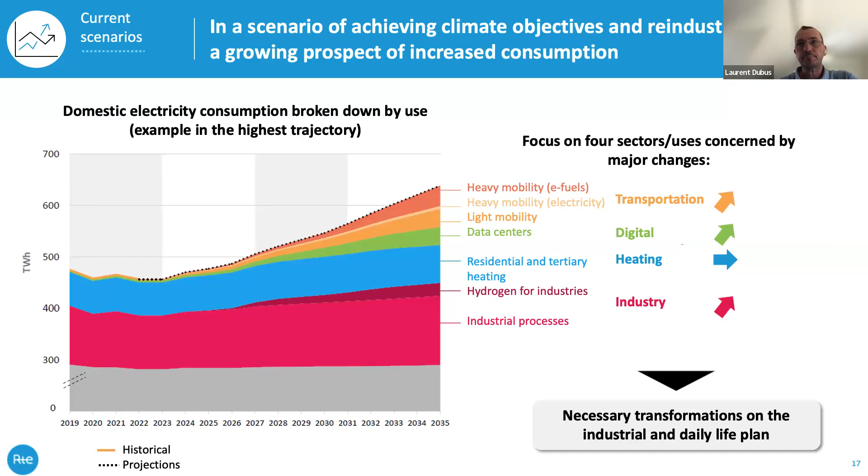So this is for the general scope, and I would like now just to show you what we do at the R&D level. I told about pride, humility, and lucidity. So first of all, the thing we are proud of is the power consumption predictions, which basically is the historical expertise of R&D at RTE. So we have methodologies. I think it's not revolutionary. I think everyone does the same thing, but it's something that works quite well, and we are pretty happy with the results we get.

So basically, we have different sources of data, and the idea is to use panels of consumers and load metering to reconstruct profiles of consumption for different uses. So I can mention, for instance, that we have a residential panel called Elecdom, the first top one. In that case, we have now 2 or 3 years of data in which we equipped 100 households with individual power plugs. So we have, I think, something like 25 individual sensors in every household, with a time step of, it's not even 10 minutes, I think it's 1 minute, so that we can monitor extremely accurately the uses per device for cooking, for charging phones, for internet boxes, and so on.

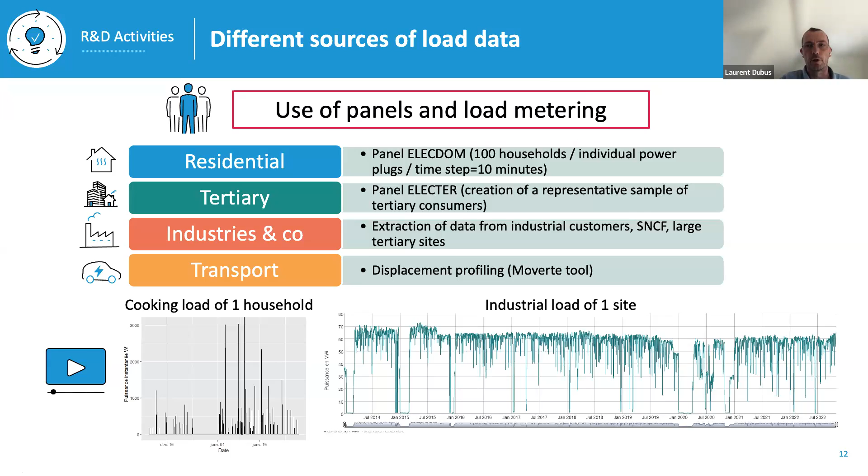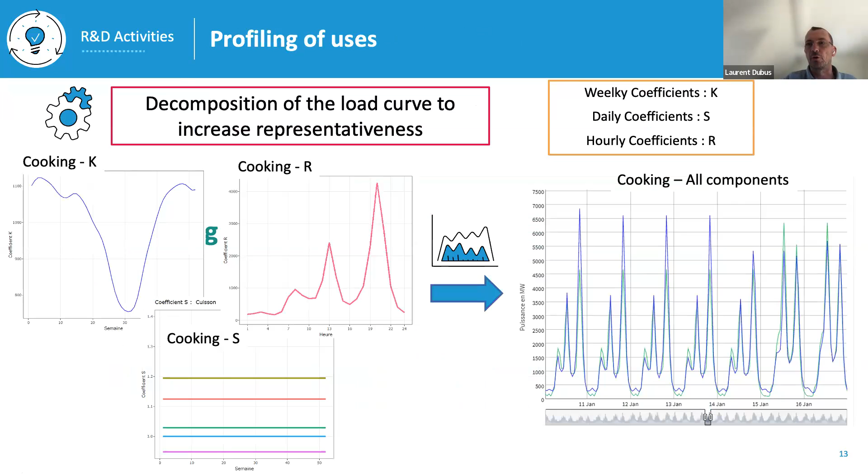So from this, we can then decompose the load curve to increase representativeness. And what we do in general is that we separate the different components from a time perspective. So we have weekly, daily, and hourly coefficients from which we can then reconstruct the load for all the profiles, and it works really well, as it can be seen here. So for instance, it's the new profiles at normal temperature. No, it's the overall profile for France. So you can see that the overall consumption is around 80 gigawatts in winter.

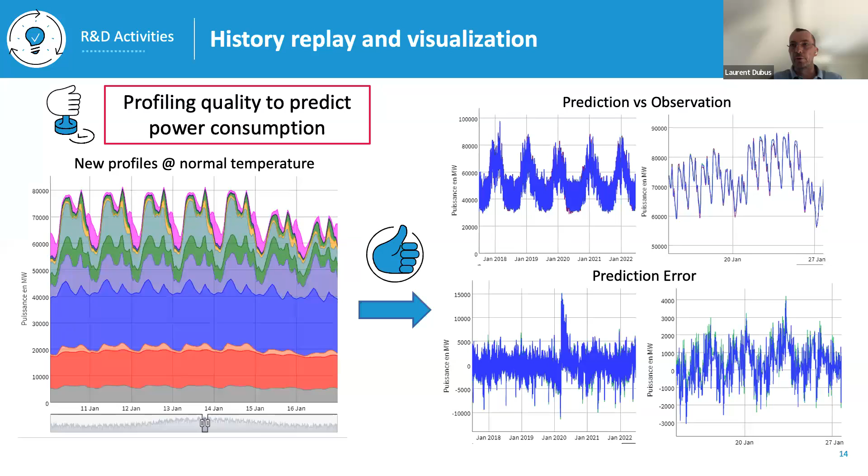And so if we compare predictions versus observations, if you look just at the right bottom plot, you can see that the average prediction error is close to zero, with more or less plus or minus 2 or 3 gigawatts of error based on a maximum value of 80 gigawatts. So it's pretty good. And overall, the mean error is around 1 or 1.5%, which is very acceptable.

If we just talk about the last one, there was a guy who was very famous at that time who predicted that the internet had no future because it was not able to handle bank transfers, for instance. I don't know if some of you know the Minitel, which was a revolutionary French invention in the 1980s, which in practice disappeared and left the place to the internet. So prediction is a difficult art, and we need to keep some humility when we do forecasts.

So how to predict the future? You can have different tools, or you can trust your good chance. But basically, when it comes to load, I guess all of you in the room do more or less the same thing, but you have different approaches depending on the time frame, on the time horizon.

So from the short term, where you can extrapolate things under unchanged consumption structure and modeling weather variability and hazard and so on. And the more you look into the future, the more the forecasts become predictions or projections, prospective rather than really forecast. The uncertainty increases, and of course you cannot be as accurate in the future as you can be in the next days or in the next months.

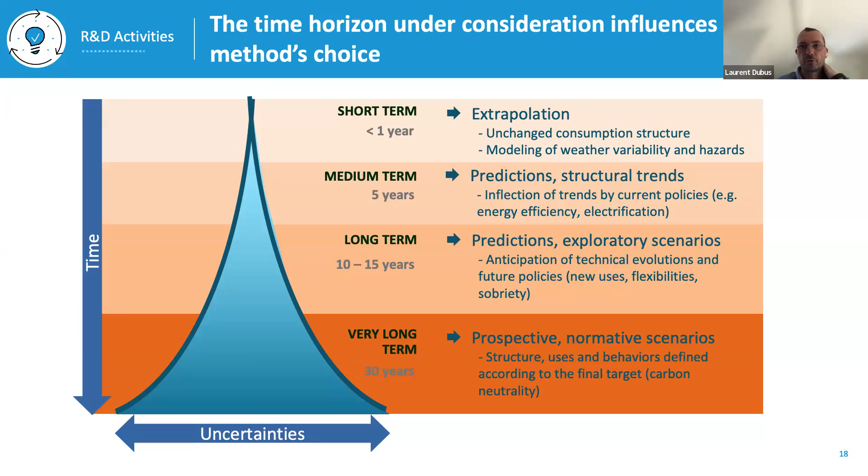What we try to do is to make an analytical representation of demand. So the consumption of a use or a branch is a mix between the volume indicator, which, for residential consumption, would be the number of equipped households. Then you just multiply by the intensity indicator. It would be unit consumption for the residential use.

And you need also, of course, to integrate socioeconomic, technological, behavioral, regulatory changes, and so on. You need also to take into account sector and total demands, which are calculated by aggregation. So basically, it's a bottom-up approach. And this kind of modeling is particularly suited to medium and long-term analysis. So that's basically the approach we take for long-term forecasting.

And of course, you also need to take into account projections or scenarios in terms of energy efficiency related to the thermal renovation of households or industries, the technical progress with, for instance, the increase in the efficiency ratio of heat pumps and things like that. You need also to consider assumptions about what we call the volume effect, which is related to the evolution of demography, the evolution of the economy through GDP, for instance, the level and the rate of electrification of the uses,

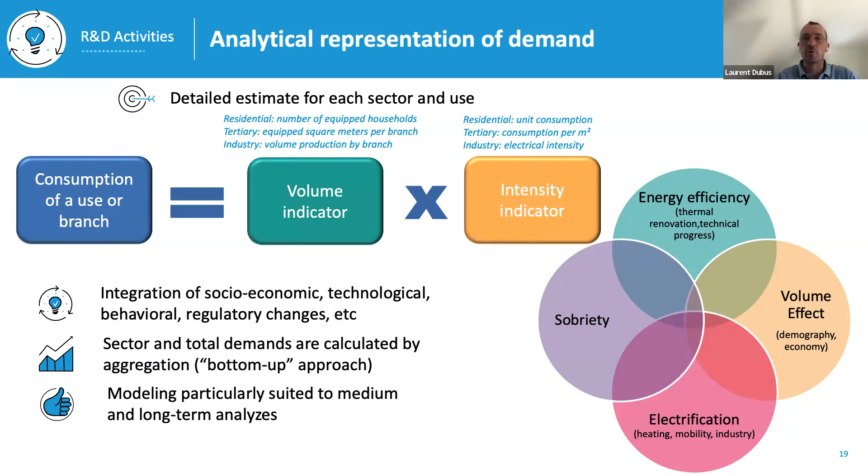and also some sobriety measures by which consumers would become more sober in terms of energy consumption, like we had this winter, because you may know that in Europe and in France in particular, we had a difficult situation this winter, and we strongly encouraged consumers to reduce their consumption, and it worked quite well because we estimate that there was a 10% reduction in consumption linked to sobriety.

Now, if we want to be lucid, we have a very, very important need in our case, which is to localize the future load, especially when it comes to the perspective about the development of the network itself. Because the network, you all know how it works, and if all the consumption is localized in a single region or a few regions, then from a network operating system point of view, it can be very difficult.

So one of the strong issues we have, and what we are working on very hard at the moment, is to really localize the future industrial load. Sorry. So we have really a prospect for an increasing electricity consumption. So we have many requests for connection to the system by customers. Not all of them are absolutely relevant, so we need to also understand how it works and so on.

You can consider, for instance, that some consumers make requests for network connection in different sites, depending on their different options based on the price of the land and so on. And so we need to carefully analyze all that to make our best estimate of where the consumption should be developed. And so we have a new strategy for four major industrial port zones, in which we want to encourage customers to install their new facilities, because it would be easier from a network development perspective.

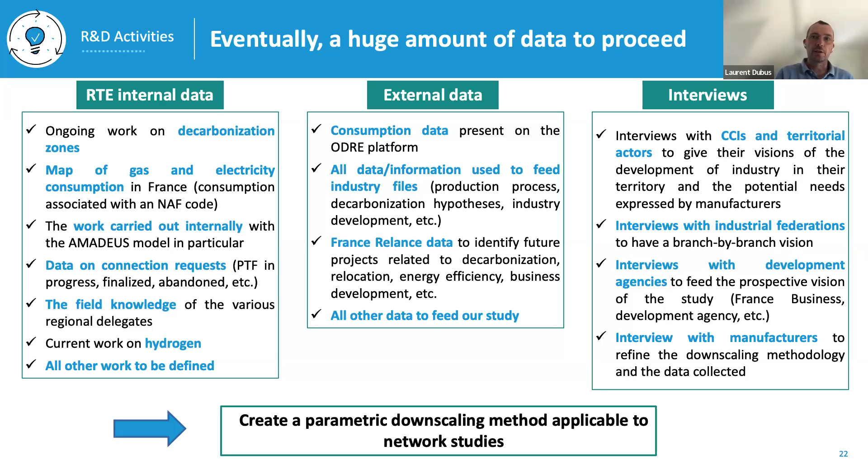And what we aim to do at the end is to create a parametric downscaling method, which would be applicable to our network studies. Coming to my summary, because I think my time is over, I would just like to emphasize that long-term perspective starts with those forecasts, or rather load scenarios, because we can't really speak of forecasts several years or even 10 or 15 years ahead. The second point is that electrification of fossil uses will really be a game changer. It's necessary to fight against climate change, but it will really be a game changer.

And so the complexity of load forecasting is increasing compared to what we knew in the past. The fourth point is that data access, collection, and capitalization is really key. We need data to improve our load forecasting tools. And also, of course, we need to not forget that climate change needs to be taken into consideration.

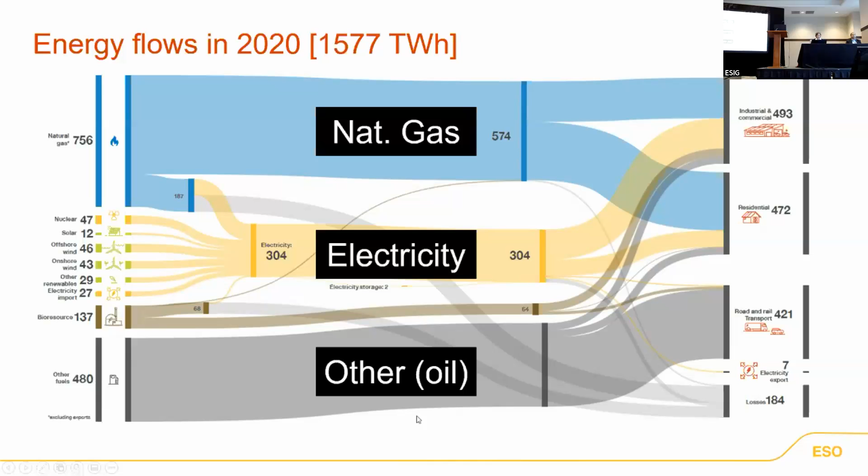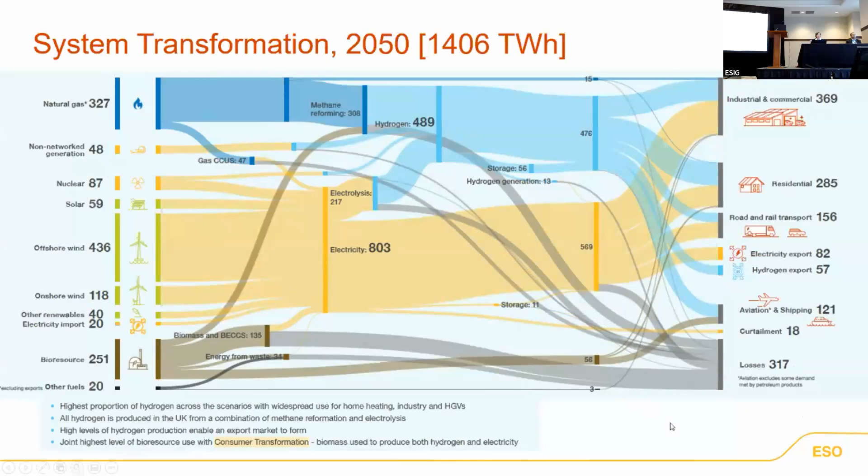We're able to look at different scenarios through a close understanding of sources of demand on the right-hand side, and then where it's going to come from, so we can start to understand how energy flows every year between now and 2050. The scenarios themselves are used in this country for network planning, deciding what assets and infrastructure we need on the ground, what market mechanisms we need, and what policy we need as well.

So we launch every year, and in that annual cycle, we're working very closely with the government and a lot of stakeholders through the industry. Right now, we're part of a private company. We are going to be owned by the government in about a year's time. Our name is not decided yet, but we're going to go into government ownership, and we're going to be an arm of the public sector, essentially, providing formal advice to the government over the next 12 months. That's something we're thinking about and getting ready for.

A lot of the data I'm sharing with you is from our last publication, which, because of how timings fall, is almost a year old. So if you're interested in learning more and seeing our most up-to-date numbers, we're launching on the 13th and 14th of July. It's a virtual event, and specifically, we're going to be talking about energy consumers on the 14th of July. But we're going to talk about all these subjects, and there's a link at the bottom for where to register. If you just search future energy scenarios, you'll find us.

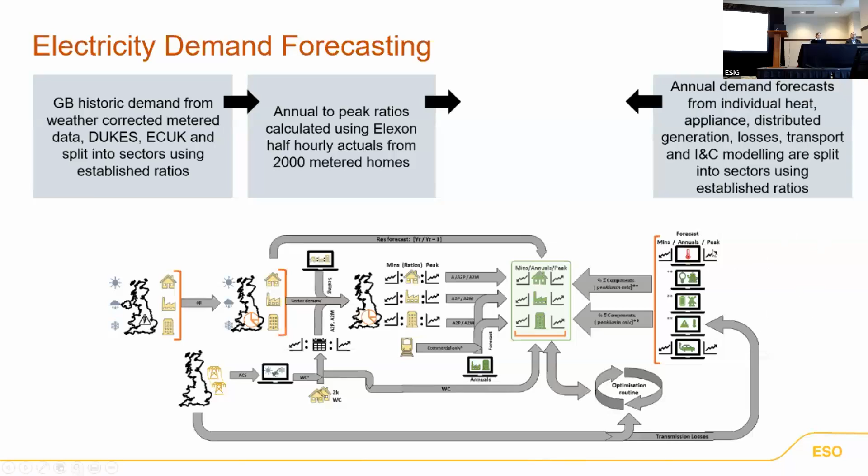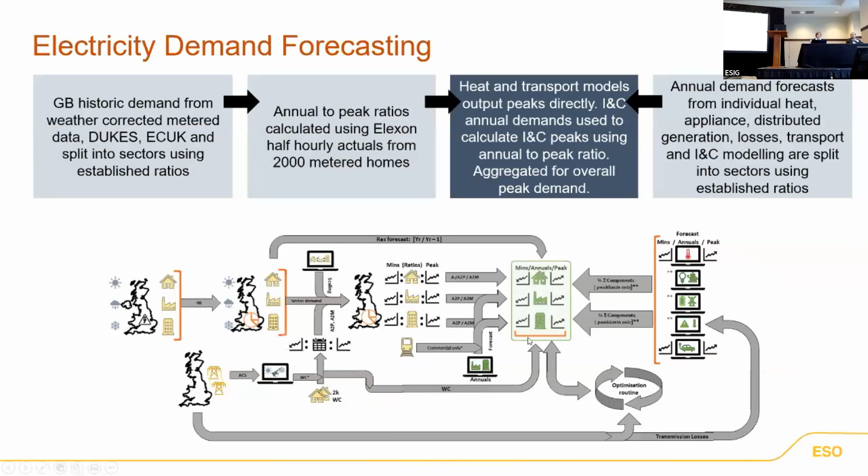To do all of the stuff that I've talked about here, we absolutely need diverse input. We place a lot of value on qualitative research as well as quantitative research, but we speak to a lot of people. We speak to something in the region of about 500 stakeholders for our first publication.

And for the stuff that I'm talking about here, there's been 26 separate engagement sessions with groups of people. We use diverse sets. We make sure that we're looking for people who disagree with each other and disagree with us as well, and we're looking for a range of views, and we test them regularly with each other. We have a rigorous process of peer review within the company, but we also test that with the government, and we test that with our stakeholders. We really want to invite that challenge, and we do that at the start of our modelling year, but also partway through.

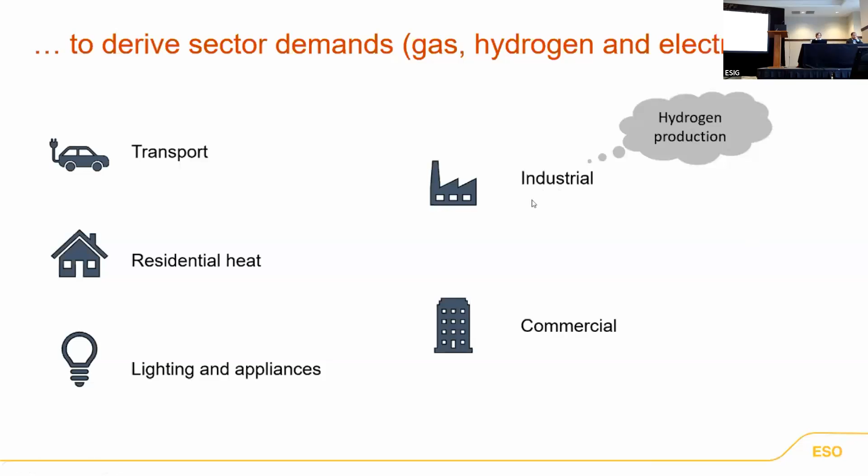And so once we've got those levers, we can put them into our models, and we get our sector demands across these sectors. Industry is very interesting. We've got a feedback loop between demand forecasting and supply forecasting because of hydrogen production. So there's an industrial electricity demand for electrolysis, green hydrogen production, and there's an industrial gas demand for blue hydrogen, for methane reformation.

Things have been particularly chaotic in Britain compared to the rest of the world. In about October, November, while everybody was struggling with an affordability crisis, we had a new budget that introduced a lot of uncertainty to price forecasts in Britain. So over the past 8-9 months, the whole world has been experiencing uncertainty and volatility. That's been compounded in Britain, but we've managed to forecast through it.

So here's our main insight really: that affordability crisis does suppress demand in the near term. I'm talking about last year's numbers here, but between now and 2026, we were predicting demand to be fairly flat. We're now forecasting between 10 and 20 terawatt hours of price elasticity, and we've seen that.

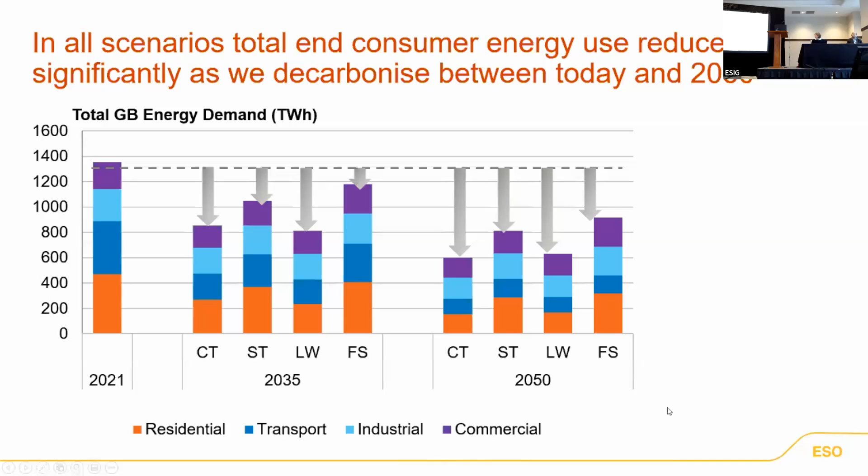So I'll get into my last few slides, which are about actual insights to give you a flavour of the kind of things we can work out. We know that end consumer demand reduces significantly as we decarbonise. At the beginning of this presentation, I showed you some energy flow diagrams, and the makeup of that energy flow changes, but it also generally reduces between now and 2050. On here you can see the stack between different sectors - the sector split doesn't change too much, but we see transport demand going down significantly.

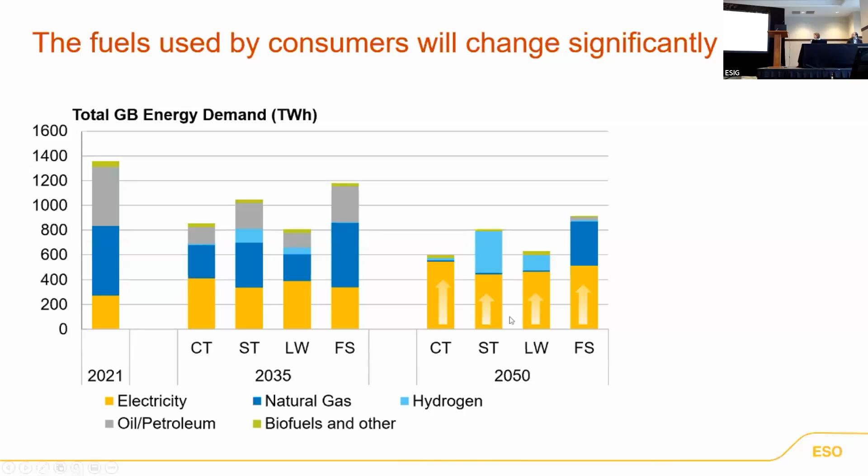The fuel people use will change significantly. A really interesting thing to point out on this slide is this bar here, sort of third in from the right. This is our high hydrogen scenario, system transformation. This is our scenario for reaching net zero by 2050 using what we think is the credible highest amount of hydrogen in the economy, including hydrogen for heating. Even in that scenario, we have a doubling of electricity demand. So we can't get away from increased electrification.

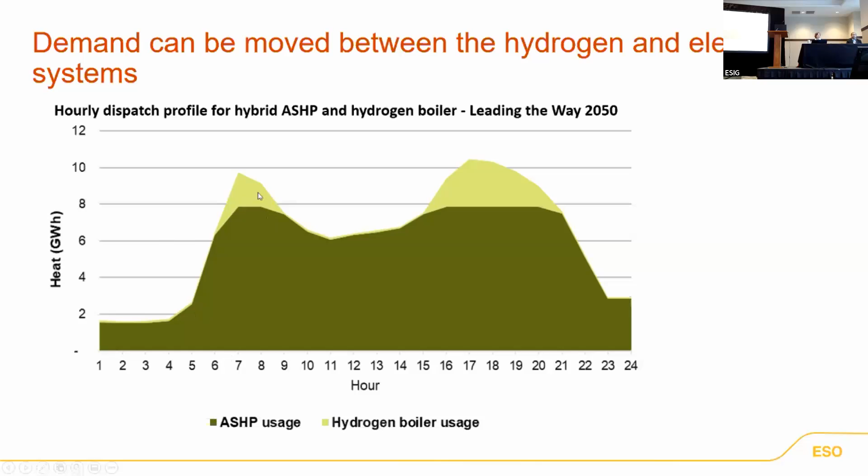And here you can see how flexibility works between different technologies. The dark area is the hourly dispatch profile for air source heat pumps, and the lighter shaded area is what peak demands would look like for hydrogen boilers. We've normalized this for heat demand rather than electricity and gas. And you can see we're able to flatten out heat pumps easier than if demand was hydrogen-based.

And this sort of flexibility isn't just a pipe dream. We are doing it already. Last winter, the ESO launched the demand flexibility service, letting consumers engage in flex and save money off their bills, in collaboration with a number of energy suppliers in the UK, and that cut our electricity use by 3.3 gigawatt hours. We've got about 1.6 million homes engaged in that trial. We're planning to make that bigger next year and then make it a part of our normal arsenal of flexibility and methods to meet demand.

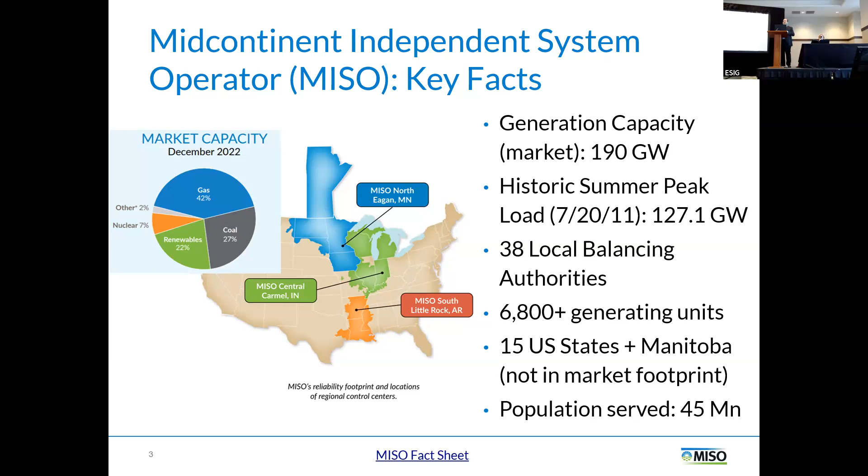The other point there is, if you look at the pie chart in the left corner, you can see the generation capacity now is very heavily weighted towards gas, and also coal. About a decade ago, this was predominantly coal. So that's one of the changes that we have seen over the past decade, and changes are of course continuing.

We have seen a lot of retirements of coal and other fossil fuel, but primarily coal, over the past decade. There's been a large increase in renewable capacity. As of the end of 2022, we had registered wind capacity of about 30 gigawatts. And also over the past few years, solar has come into the picture quite rapidly. Again, as of the end of 2022, about 4.5 gigs of solar photovoltaic.

Some of the other things that we are seeing are many cities, many states, and also member utilities have aggressive decarbonization goals or aggressive clean energy goals. And that's also driving the pace of the energy transition.

A few more things to think about are that as we see this increase in renewables, more of our fleet is going to become weather dependent. This also ties into the fact that we've also seen more frequent extreme weather events. And so now, the uncertainty in operations is also increasing, and so we are having a lot of challenges in managing that. And then the last point is about increased electrification, which I'll talk about a little bit later.

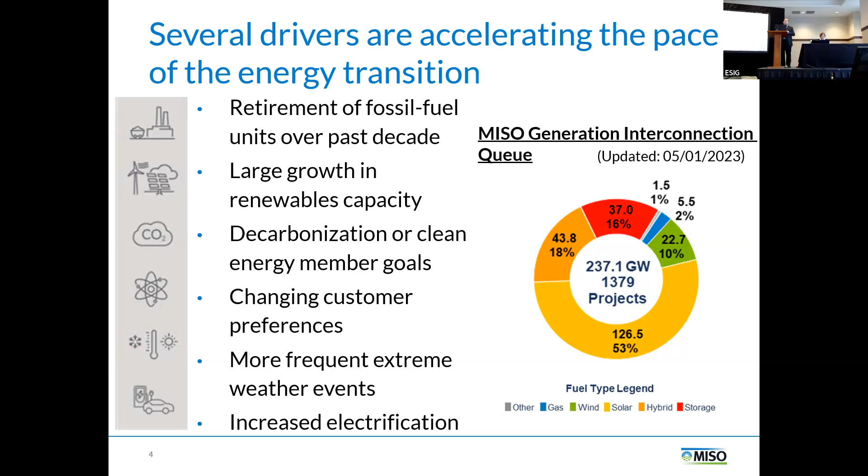On the right is a picture of our generation interconnection queue. As you can see, it kind of gives you a snapshot of what the future might look like. Of course, as AG from ERCOT had mentioned, typically not all of these things get built out. But let's say even if a fourth of this gets built out, you're talking about 126 gigs of solar PV in the queue. So even if a quarter of that is built, that's quite a substantial change in our generation capacity mix.

In order to deal with this energy transition, MISO is working simultaneously across multiple areas. It spans planning to operations. So the first is the market redefinition. This is really talking mostly about our energy markets, but also capacity markets more recently: whatever changes we need to make to our market constructs in order to accommodate this change.

Then there are also system enhancements. We have a major project ongoing to put in place our next generation market engine, which will be modular. It'll be much more performant given how many more resources we are expecting. We still want to be able to solve that market and clear the market in about the same time. So we really need a new system for that.

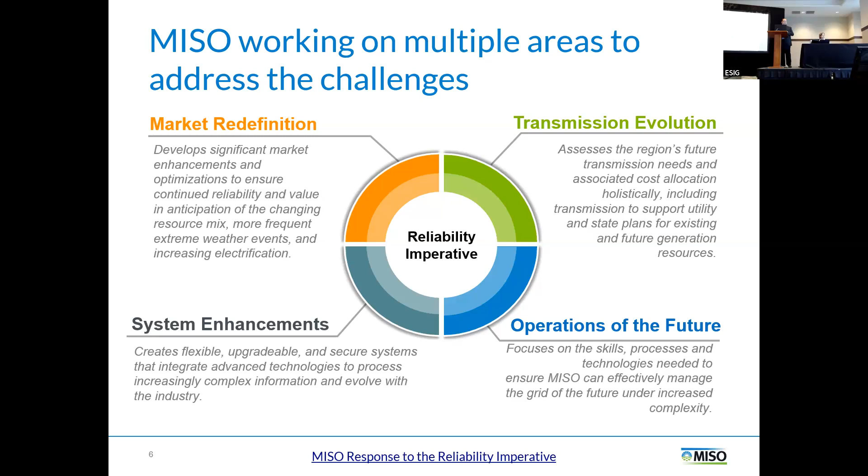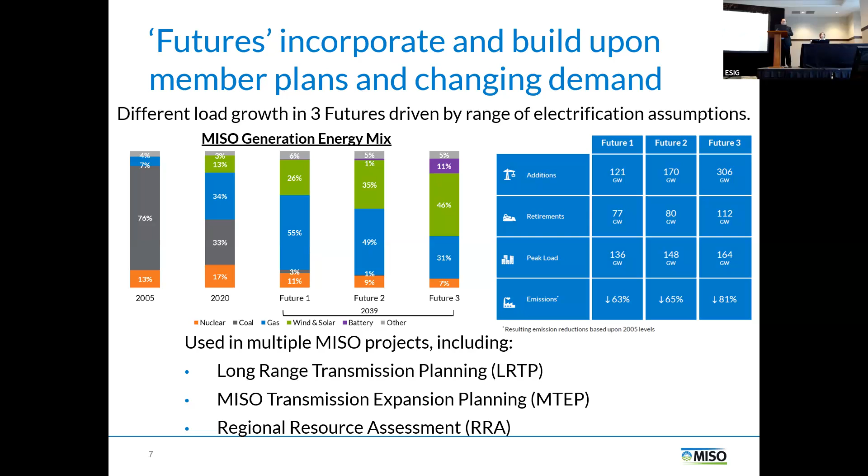And you can see, ranging from Future 1 to Future 3, they get more aggressive as you move from Future 1 to Future 3. These futures are then used to plug into various planning initiatives and also various analyses. I won't be able to go into all of these. We have our long range transmission planning, we have the transmission expansion MTEP work, and then the last piece there, which I'll expand upon a little bit, is the regional resource assessment.

In terms of how we looked at electrification, we sought out help from some experts in this field. One is the Applied Energy Group, and the second is Berkeley National Lab. Both of these organizations helped us to identify estimates of the market potential of electrification of various technologies, things like water heaters, electric vehicles, and various industrial processes.

A number of assumptions were considered depending on how mature we think these technologies will become, and we also got detailed numbers for our different zones. In MISO we have 10 zones, LRZs, and within those we got zone-by-zone numbers, so we can understand what's happening at that zonal level. You can see the projections going out over the next 20 years in these two figures.

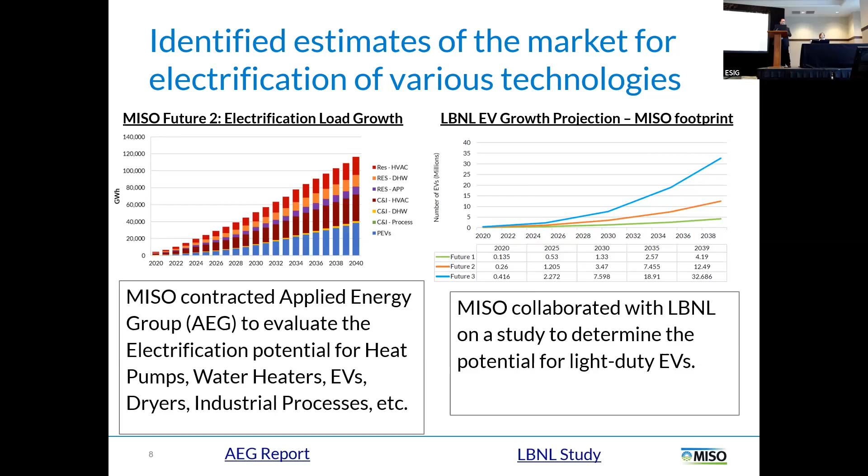One of the key insights here is that, depending on the future, the renewable penetration levels range from about 26% to 46%. But one of the studies we had done a few years back, the Renewable Integration Impact Assessment, the RIIA study, indicated that we're going to have some challenges as we cross the 30% penetration level for renewables.

Somewhere between 30% and 40%, we're going to see a lot of challenges in terms of curtailments, having to deal with regional transfers, and potentially, in some local areas, voltage stability issues due to the weak grid when you have a lot of inverter-based resources. That's one of the challenges you might face, so that's something to be concerned about.

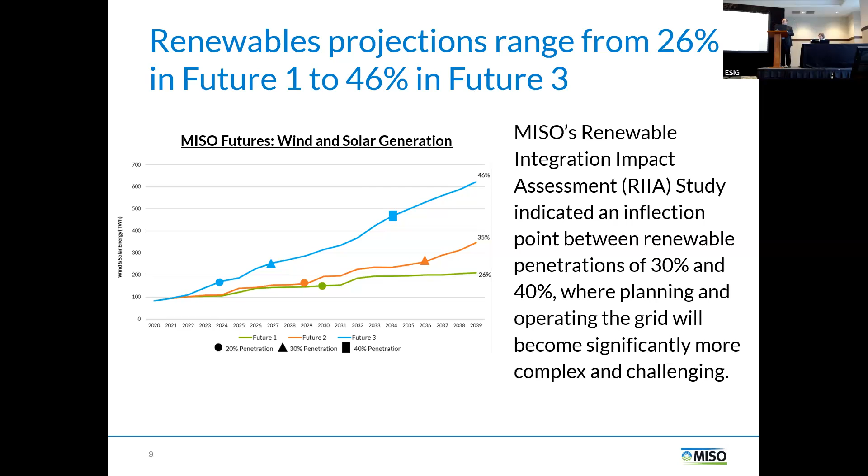Coming back to the MISO futures, that was two years ago, and now that's a little bit out of date. So MISO has been working to update all of those projections. Just a few months ago in April, we released a revised version of Future 2. We are currently working on revised versions of Future 1 and Future 3, which we hope will be released sometime later this year.

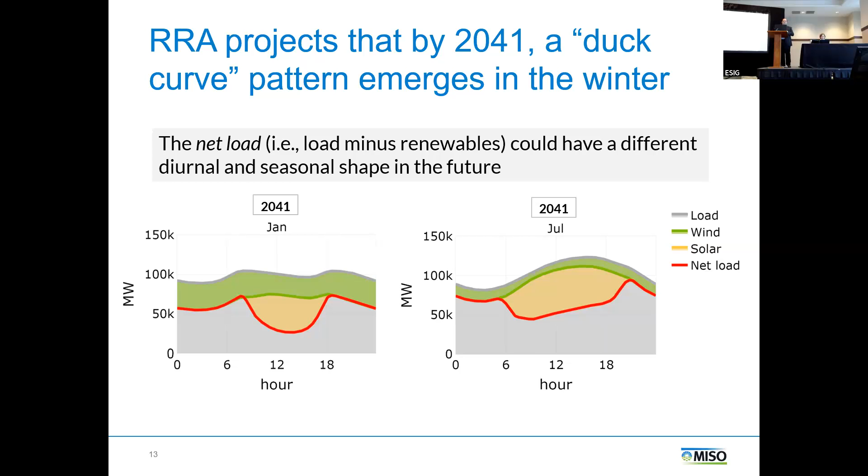Now, in terms of potential disruptors that could impact all of this, one is risk of retirements due to various policies. The RRA picture that I just showed you did not include the IRA impacts, because we had more or less done most of our number crunching by the time IRA's impacts really came into the picture. We were not able to pivot at the last minute and put that into our analysis, but we will start doing that going forward in our reports. So that's one thing. We could see accelerated retirements of fossil fuel units that could lead to some challenges.

We could see more aggressive decarbonization goals from states, cities, utilities. It could also be from corporates. We are hearing about Google and Amazon and various others wanting to move more towards decarbonization. Then there's, of course, the pace and scale of electrification. The studies that we did for EVs and many of the other technologies are a few years old now. EV growth may accelerate, given the policy support. And then there are things like data centers, crypto miners, distributed energy resources, microgrids.

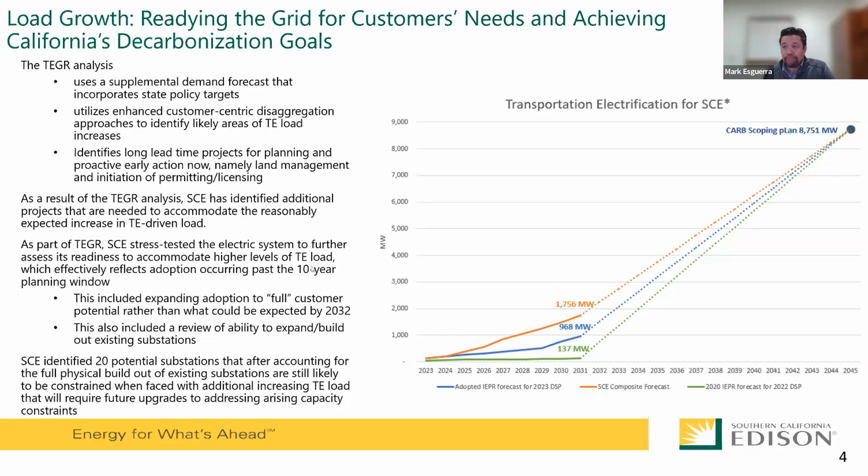And so a big part of the forecasting is understanding really where load will materialize. As part of our general rate case process and our normal planning process in the state, there's a traditional disaggregation process on how we allocate load from the system level forecast down to our distribution feeders. As part of that, we also work to understand which customers are likely to adopt. We were also building our relationships with some of the larger transportation electrification fleet operators in the area, and really trying to map that adoption by different customer types.

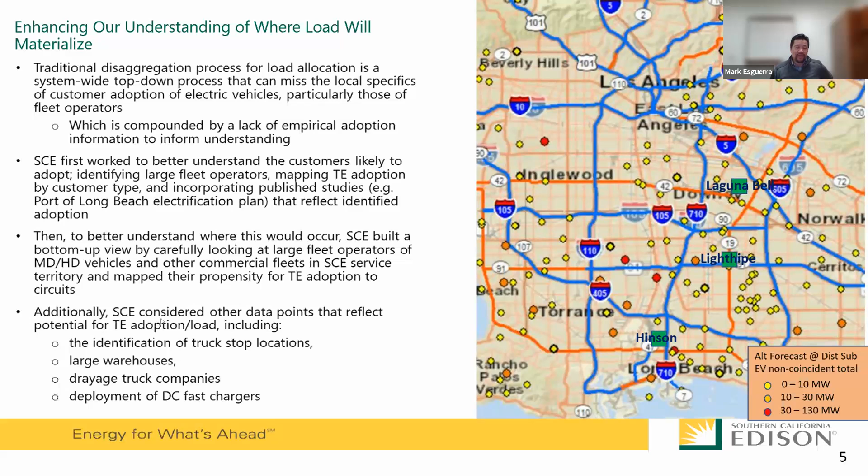Thank you. All right. Where I left off, I think we talked about different data points that we consider as part of our forecast. So I'll get into a little bit more about the EV forecast comparisons and some of the details of how we forecast. I'll jump to the next slide here. As we mentioned earlier, the state forecast we were going to be mandated to use was a little under forecast at the time. It's since caught up, but in the work that we've done, we break it out by vehicle type.

For light duty vehicles, we performed a regression analysis to identify the key indicators of EV adoption by using historical EV adoption and customers' demographic and socioeconomic data. In addition, we also reflected potential EV adoption from some of our low-income customers by utilizing our most recent internal customer segmentation analysis, which was captured by our own customer service database.

We then allocated the supplemental forecast using some of the different policy measures, particularly what the California Air Resources Board had in their mobile source strategy forecast, from our system level down to the circuit level based on relative propensity scores for all our various distribution circuits within our service territory. The next two are medium and heavy duty.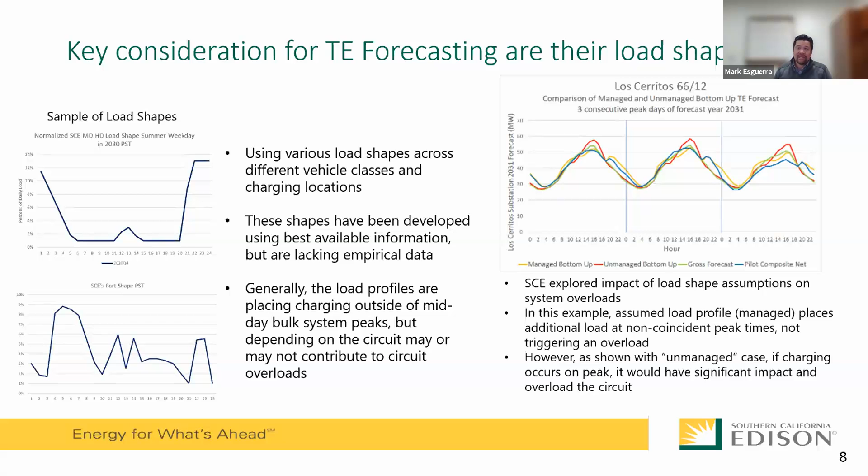We looked to see if we had cases more similar to our time-of-use rates, and we definitely saw impacts to our cost forecast in terms of infrastructure. There are a lot of curves there—the red curve is unmanaged, and it's higher than the other items. The yellow curves represent a more managed profile, along with other curves we have there, and you can see it's much lower than the red curve. Depending on where your system limitations are, this could create overloads.

So in short, we're running the grid and seeing that forecasting really matters. More work is needed, but based on our analysis, targeted investments are needed now. We've done our bottoms-up analysis, and Kevala has done some work we're going to learn from as well as others, to improve on that. There may be multiple scenarios we'll have to perform and figure out how to align. What we've seen is that based on our forecasting, about 10 to 15% of our distribution assets are being proposed where we're seeing high amounts of transportation electrification. We think that's going to change.

We think now that the forecasts are getting updated and more interest is growing, we're going to see more growth. But we do have growth in some key areas, like the Port of Long Beach, that based on their projections, we're seeing things that could be anywhere 10 to 20x of what they were looking at, which would be entirely transformational, and other challenges for us to build out the grid as well as how we get other supply resources.

We're seeing this today, and we're using information we're getting today to inform our forecasting. One thing we've noticed since 2021: we were tracking just the transportation electrification requests coming in at 500 kVA or higher, half a megawatt or higher. Since 2021, we've received about 700 of those, probably closer to 800 now factoring in this year. When you look at it year over year from a request perspective, the volumes have been going up. But even more importantly, the average size of these requests is also increasing year over year.

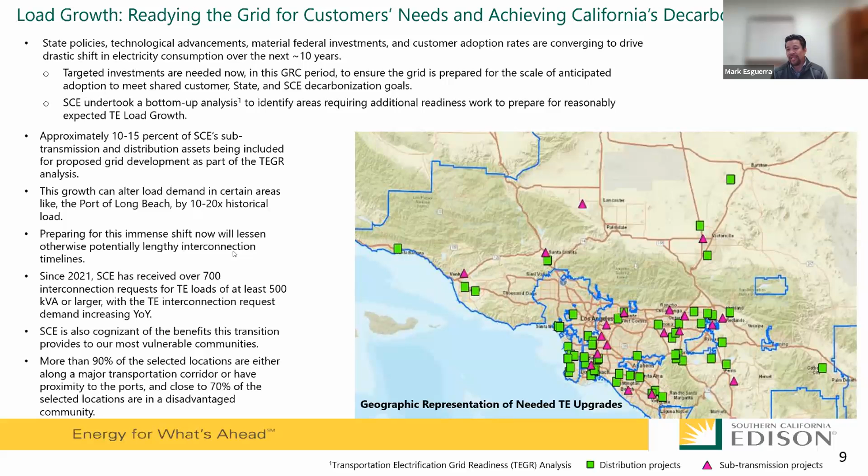In addition to the forecasting and the impacts, we are taking all the work we have and trying to take an integrated approach. We have a lot of infrastructure forecast to be replaced from an aging perspective, so we're really trying to marry that up with where we're seeing electrification. As we're building those work plans and layering in the forecast, we want to make sure we're coming with a comprehensive solution, not just replacing like for like, but factoring in some of the other needs. And we're going to continue to see how grid modernization capabilities such as load management tools, leveraging DERs, can help us there.

We're really looking for more partnerships along the state to help meet this, because we know we can't do it alone. It's going to take good forecasting, continued learning on the forecasting, applying those methods. It's going to require wires, technology, load management, customer behaviors, all the above. So with that, I'll stop there. Thank you for the opportunity.

Thanks everybody. In our first session this morning, we really heard from practitioners and planners working in industry directly on scenario analysis of what the future might look like in terms of load and what that means for the grid. I really liked how Mark brought up the distribution side, echoing some of the things we heard yesterday afternoon. The overall theme for today, bringing things together, bringing it all together. Now we're going to turn back to the methods side of things: how do we do load forecasting? Ryan's also going to expand our thinking a little. We've been talking about how a lot of different things are coming together, all these demand sectors and the grid, and Ryan's going to expand that into different fuels as well. When we think about total economy decarbonization, we've talked about hydrogen, but that also elaborates into what other kinds of lower or zero carbon fuels we might be using, and how those all interact with each other. Then we'll be hearing from Andy from Itron again about bringing all the sectors together and all the complexity we have to deal with, and how we get it all straight. So with that, I'll turn it over to Ryan.

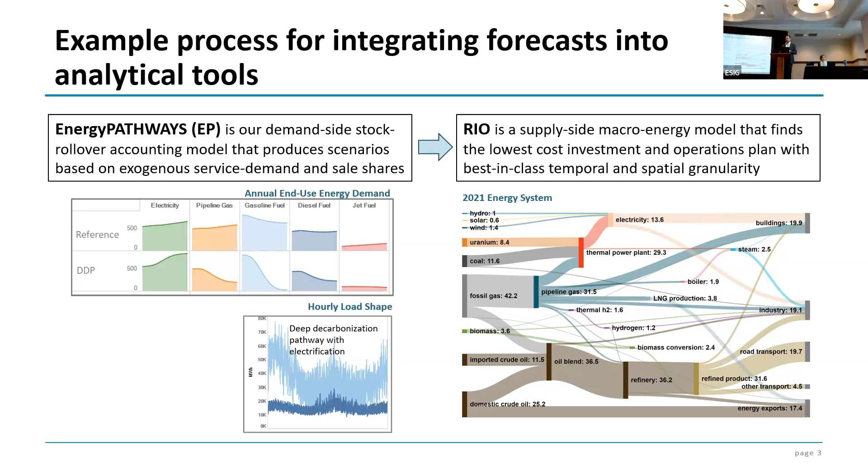RIO is a capacity expansion model, and many will be familiar with that kind of architecture for a tool. The thing that makes RIO different is that it is economy wide. As I go into the sectoral coupling section, I'll talk about why I think that's important.

There are a lot of models that approach this question of temporal resolution differently. The way that we do it in RIO is we use day sampling. There are a few other techniques out there - models of an older stripe that sometimes use duration curves. I think the main challenge with that, as we recognize, is that when you lose the chronology, if you're modeling high renewable systems, storage becomes a lot harder to integrate into the tool.

This is also true if you're doing either day or period samples where the periods are too long. Again, that becomes challenging to represent both high renewable scenarios and storage.

For us, what we found is that below about 750 time slices a year - and we're looking at sequential hours in these day samples - we don't have great stability in the outputs of our capacity expansion work. So just as one benchmark for the group here. And finally, there are many other tools that just use 8760s for capacity expansion, which is great.

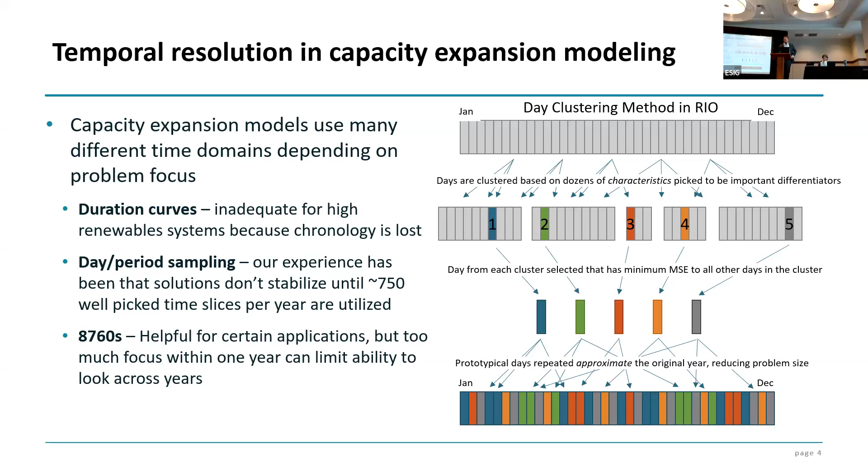So there are trade-offs here in the resolution. One reason why this question of temporal resolution is so important is looking at resource adequacy. In the comments I made yesterday, I talked about why I thought resource adequacy was perhaps understudied at this moment, and why it's so important, I think, moving forward.

So there are different approaches that we've seen in models for dealing with resource adequacy, and this is primarily in these types of capacity expansion models.

One of them is you run your capacity expansion model, and then perhaps you go to a production cost model step where you simulate either more weather conditions, more years, what have you, and you look for violations. And then in that case, if you find a violation, you may go back in and say we needed to add a new thermal power plant, and you do so.

The disadvantage with that is it can obviously lead to some suboptimal behavior, because when you do find a violation, it's hard to understand systemically what the right resource to add would have been. Obviously, adding thermal is an easy solution there, but not always the right one.

There are other models, and ReEDS is an example here, where we kind of identify super peak time slices. And the biggest problem that we've encountered in doing this is that oftentimes in these planning models, not only are the super peak time slices no longer a summer afternoon, as we've talked about, they shift around the year, but also it's net load that we really care about, not necessarily gross load, right? And so at that point, the times of greatest system stress are oftentimes when we have moderately high load, doesn't have to be the peak day, and then low renewable output. And oftentimes when that occurs 1, 2, 3 days in a row, right?

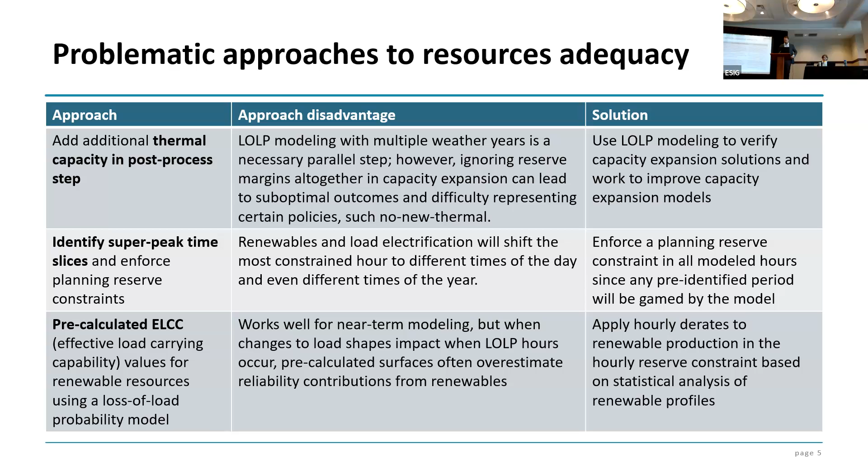So I'm going to shift gears here and talk a little bit about sector coupling. And I have a really simple illustration of the differences in capacity expansion model results that come from a reference load scenario, a high electrification load scenario, and then a high electrification plus fuels, or economy-wide decarbonization scenario. So the details here don't matter as much, but just know that there are 3 scenarios in the next couple of slides: the clean electricity, which is just a reference case load, high electrification, and then zero carbon economy.

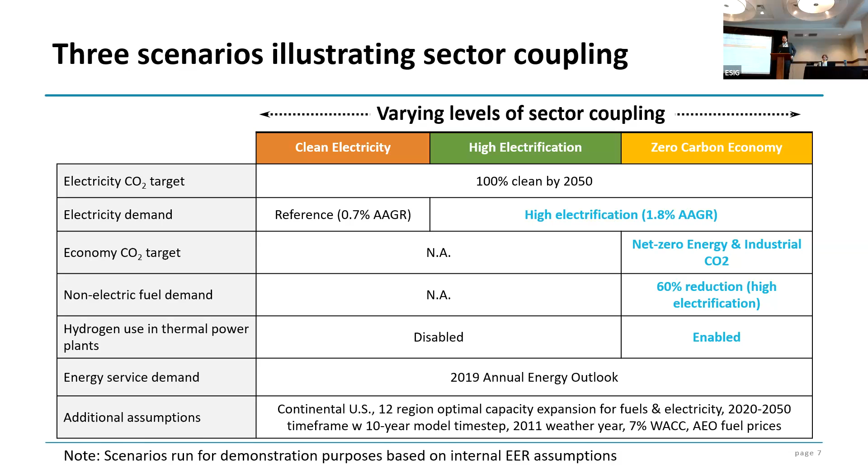And in each of these cases, we are shooting for a 100% clean electricity target in 2050. So if you look at electricity load, right, this is what we see, where the clean electricity case on the left, we all have seen figures that look like that. It's modest load growth through 2050. The high electrification scenarios, which we've been talking a lot about, there in the middle, and then zero carbon economy, where we've added new loads through sectoral coupling, both hydrogen electrolysis and then some other sectoral coupled loads in industry. And the one I'm highlighting here are industrial boilers.

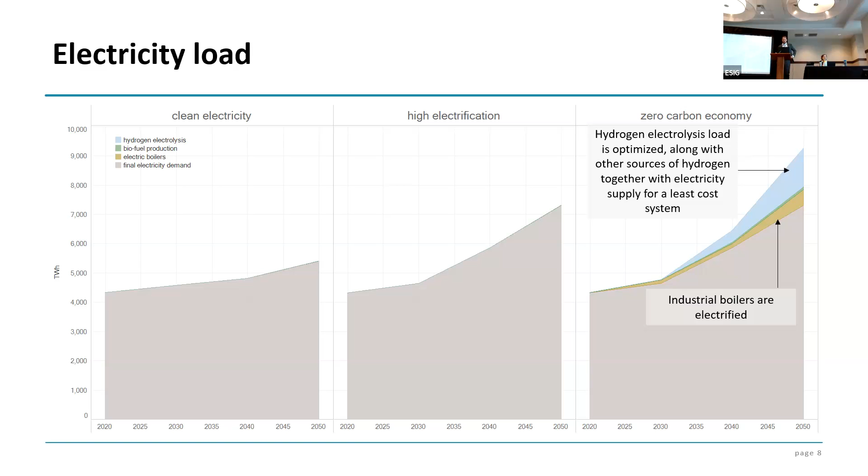The way that impacts the supply side is illustrated in this example here. So first, one thing that you can see is that the percentage of delivered renewables to those loads go up, right, across each of the scenarios. With the zero carbon economy case, because you have such a high demand for residual fuels in that economy, it gives an outlet for electrolysis loads. The model builds electrolysis, and because that electrolysis becomes a flexible resource that you then can turn down during days of high load and low renewable output, right? Both our curtailment goes down and the amount of renewables as a percentage of the system goes up.

The other thing is at the bottom there, you'll see gas with carbon capture showing up in both the clean electricity and the high electrification cases. In most of our work where we look economy wide, we don't find much gas with carbon capture. Not only is this because it's outcompeted by the renewables when you have the large flexible electrolysis loads, but the other piece of this is you're competing for somewhat limited geologic storage with other places in the economy, right? If you look narrowly just at the electricity sector and you assume all of the sequestration storage can be used for electricity, you will perhaps get a different answer than if you look economy wide, right?

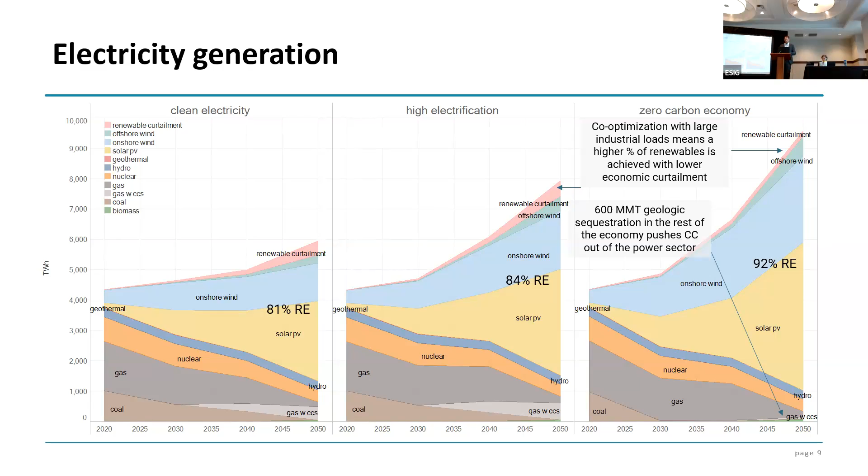This is still a case in the zero carbon economy case where we have 600 million tons of sequestration annually. So by no means a low CCS case. The CCS is just happening elsewhere than power. So this is from our annual decarbonization perspective last summer, and it brings some of these things together. So you'll see the electrolysis load there branching off of electricity in the Sankey diagram, going through to fuel synthesis.

And the thing I want to emphasize here is it is important to have an exogenous load for electrolysis beyond simply saying our model does hydrogen and we do electrolysis and we can send that hydrogen back to the power system, right? Because that is typically the least economic use of hydrogen in these cases, right? But without that hydrogen load there, you're kind of unmoored when you plan such a system, knowing how much electrolysis load will there be? What are the hydrogen demands? Where are they in the country? All those questions, right?

Biomass is the other one that I haven't mentioned yet, which is that the biomass that I'm showing here, which is about 10 exajoules, represents about a 150% increase over our biomass use today, including corn ethanol.

But very little of that biomass goes to the power system. And it goes either to hydrogen production, where then the captured carbon is sequestered, or it goes to make different fuels. If we run the same analysis narrowly looking at electricity, we will oftentimes see BECCS capacity show up in the electricity system as a way of offsetting residual emissions, if we just constrain a zero emissions target for the electricity system and run that separately.

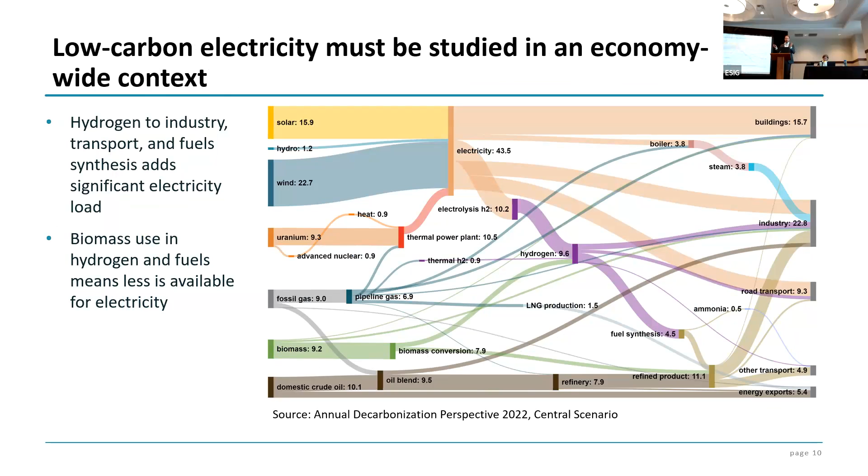So, these are just a couple examples there on kind of ways in which I think the solution in these power system planning questions change as you broaden the scope of the analysis and include more boundary conditions. The last thing here just to highlight, and this perhaps is a point of good news on the reliability front, which is this sectoral coupling that I've just talked about can improve your reliability through renewable overbuild.

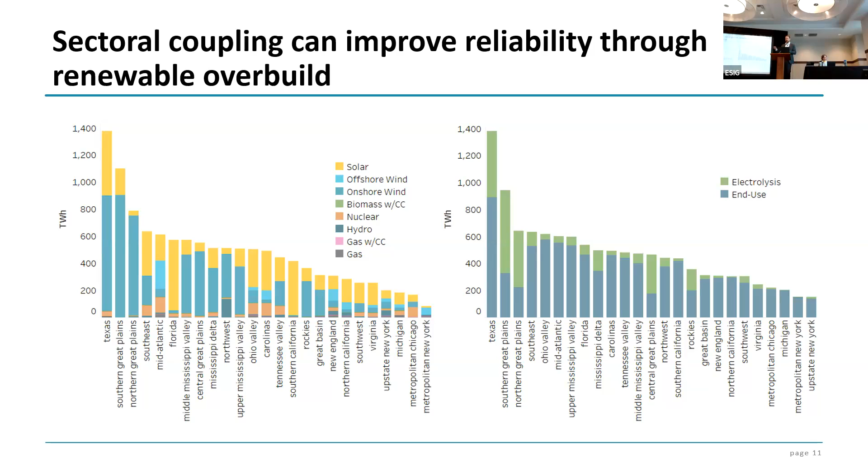And I think what's interesting here, if you look at the figure on the right, you can see electrolysis load as a percentage of total load, and these are in net zero scenarios in 2050. And you'll see quite a few zones there where a third or even a half of total load in that zone actually goes to fuels production. Looking at Southern Great Plains, for example, really good wind resources and connected to the rest of the country through hydrogen pipelines.

Okay, so last section here, changing gears and talking about distribution systems and the way we integrate some of these into our system planning models. This is an example of a study that we did with Portland General. And they were interested in looking at, in high electrification scenarios, what is the value of distributed resources in Portland, and how do we quantify some of those benefits, and how do we quantify the contribution that deploying distributed resources either behind the customer meter or at the distribution feeders is going to have to the bulk power system.

To approach this, we ran an economy-wide decarbonization scenario, very similar to what I just showed you. But in addition, when we have the bulk power system zone for Portland, we attach to it 15 feeder archetypes, and track the power flowing back and forth between each of those feeders and the bulk zone for PGE. These 15 feeder archetypes are a clustering of the 591 feeders in PGE's service territory. And we had 5 customer category bins and then 3 feeder utilization bins.

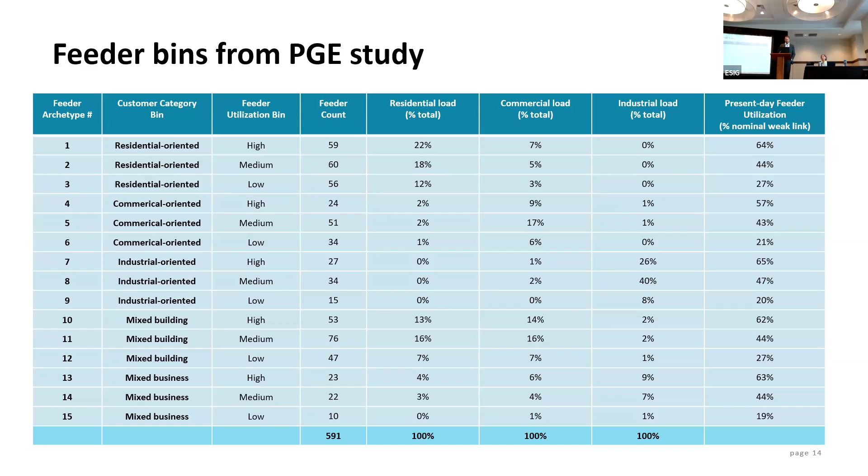So I'll show this here. This is just a list. I know it's going to be hard to see, but the things we clustered on were, is this primarily a residential feeder? Is it a commercial feeder? Is it an industrial feeder? And then how much residual capacity is there on the feeder? So the last column there, the present day feeder utilization, is measured in percentage points of the nominal weak link on the feeder. So when that gets up to the safety buffer in that system, they need to go in and add a new upgrade to the circuit.

So we've got these 15 archetypes, and then ran the study looking at different scenarios around how much DERs were adopted, and then in the capacity expansion model allowed for different resources to be selected in different parts of the system. I think the detailed results here are less important than the overall concept, right? But we found some significant avoided cost potentially in the feeders that were already close to triggering an upgrade. And then many of the feeders we actually found had significant headroom left, and that we could do high electrification without needing new upgrades.

I'll just mention here that Portland General already has a lot of electric heat, and when you put in heat pumps and you replace electric resistance heating, the impacts of building electrification are less severe than when we look at this in the Northeast, where we would perhaps see a bigger difference.

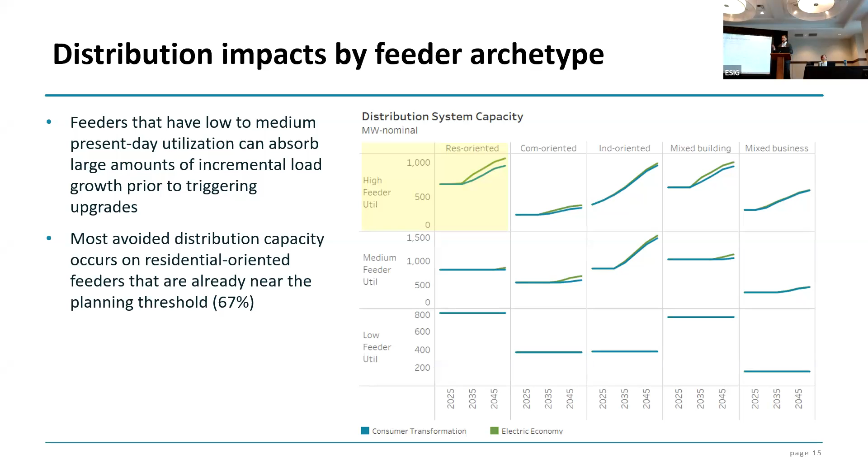So I look forward to any discussion. I've got one more slide.

So one other application for this is we've used this type of framework doing gas-electric studies for a number of utilities and jurisdictions in the country, looking at, if you have high electrification or if you have high clean fuels and pipelines, what is the trade-off there? So that involves looking at this question of distribution upgrades in as much granularity as you're able to,

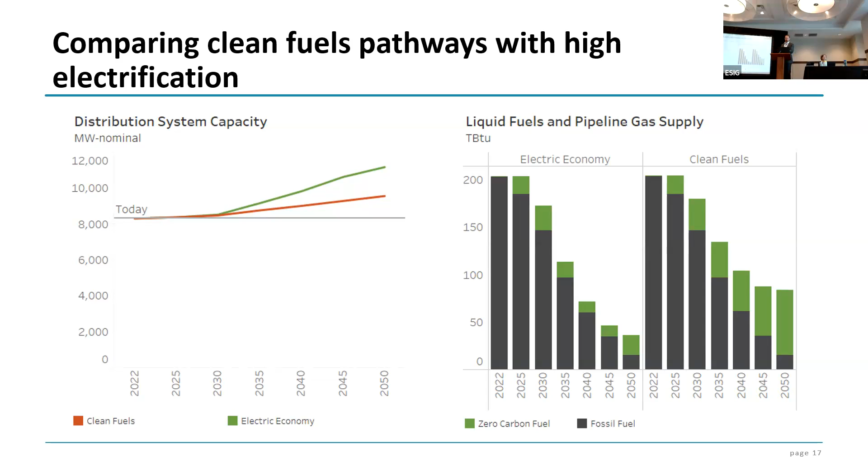and then also bringing in the economy-wide perspective to understand what are the feedstocks that we have, what are the competing uses, how much volume is going to be delivered through the pipelines, what are the implications for rates. So this question of high electrification versus high clean fuels brings many of these pieces together in one study. So thank you, and look forward to discussion here.

And I think the challenge that utility forecasters face is they're relatively resource constrained. So they don't have the luxury of diving into the depths that the researchers can. And so I think the quest that we want to undertake going forward is trying to take this research and embed it into the utility forecast as best that we can. So to kick things off here, I'm going to pull up my pointer. I got it.

Okay, so this is the statistically adjusted end use modeling framework that Itron developed in, I think, the late 80s, early 90s. It's a hybrid approach that embeds the best characteristics of end use modeling frameworks, so pure end use approaches that look at technology level detail, perform stock accounting, and look at the rollover of the stock, saturation and efficiency trends, along with econometric methods that look at economic trends, price, weather. So we bring this together to try to get the best of both worlds.

And the most recent survey that we conducted was in 2016, and right now between 60 and 65% of utilities are using this approach. So it's currently the prevailing method, but it's only as good as the data that we can put into it. So I'm going to begin breaking it down a little bit.

If you look at this box in the upper left corner here, residential cooling, what we're going to do is come up with an engineering estimate of our residential cooling loads. This, of course, begins with the equipment stock. I'll use the example of the central air conditioner. The central air conditioner is going to have a saturation, the percentage of homes that have a central air conditioner. And then we're going to look at efficiency.

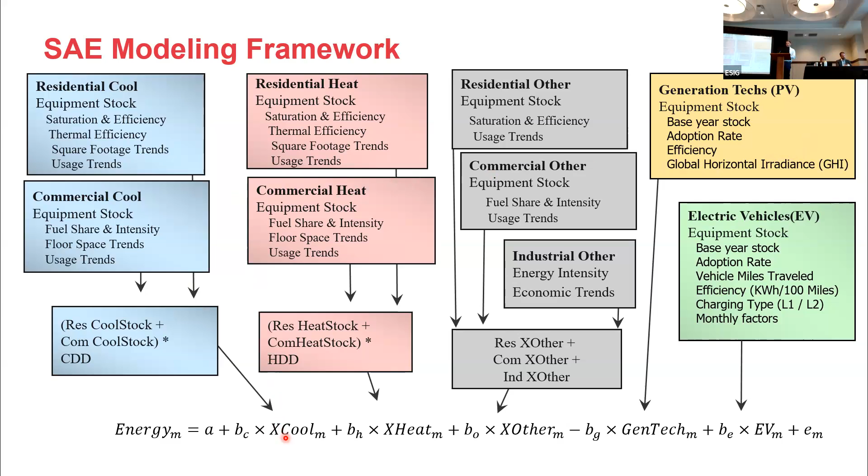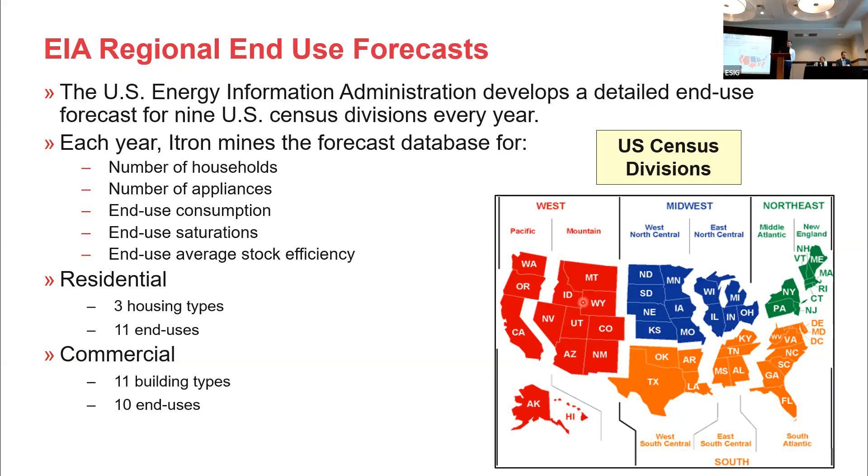And so that brings me to where we get the data, right? So we're starting with the EIA data, which comes along with the spring Annual Energy Outlook forecast that the EIA releases every year. So they have end use level information by census division. Here you see 9 census divisions represented. And some of them are pretty well contained geographically, maybe the Midwest, Mid-Atlantic. Others are quite broad, kind of the broadest is the Mountain. And so, the challenge here is maybe the regional information isn't adequate. We need to make refinements to improve the inputs and calibrate into the data. So this is an area where I think hopefully we can improve going forward.

But first, just talking about what we get at the back end here. This is going to be an annual end use forecast. It's going to be represented by customer class. And this is key as we start looking in the long term, in terms of this is ultimately what's influencing shifts in the hourly load shape. So underneath all this, we also have shapes that we get from NREL for ResStock and ComStock. And we often also calibrate into, at least in aggregate, residential cooling and residential heating shapes based on the AMI data. This would be repeated by rate class.

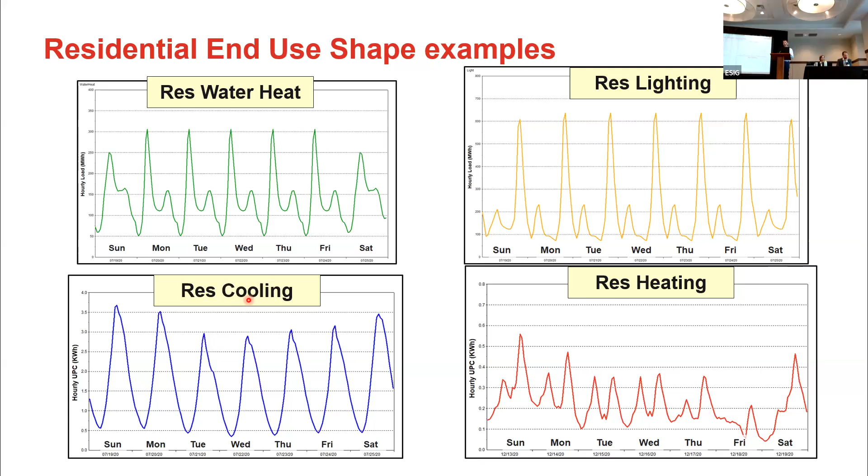So this is a decent starting point, and I think the advantage is it's comprehensive in nature. We have all the end uses represented. We have the behavioral effects represented. So theoretically, it's comprehensive. But I think, again, as I mentioned, we need to work together to refine those inputs such that they're representative of both the current reality and also what we expect in the future under different scenarios or probabilistic cases.

So areas for improvement that we've discussed as an internal team within Itron is calibrating into more localized saturation and efficiency, as well as what we call unit electric consumption. So this is basically the amount of electricity consumed by an appliance, for example, a refrigerator. We have some data here that we can leverage from the ResStock and the ComStock that NREL provides, 2018 base year. This is a good place to start.

And then in addition, we do need to integrate those behavioral effects. I think some of the utilities have brought in the Google mobility data, but perhaps not all of them. And then I think there's some advancements that we can make with the economic inputs. I'll dive into that in a minute here. And then also, of course, the new technologies that we want to pull in.

I think one key piece that we lack is tracking the data on a daily basis. So we're going to begin with a monthly forecast, but we want to allocate that to days. And this is where you really learn as a forecaster. You're going to develop quite a bit of intuition there.

This was very helpful when we would track, for example, residential loads through the pandemic. We could see how the Google mobility data affected base loads, how it affected cooling, as well as heating loads.

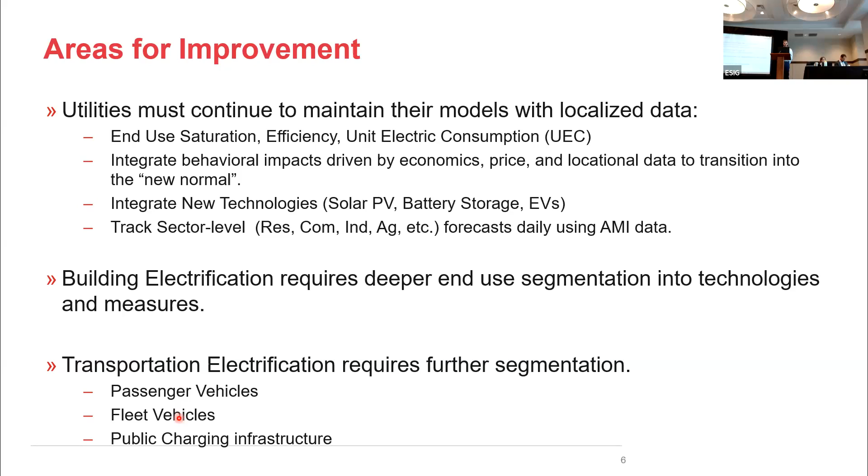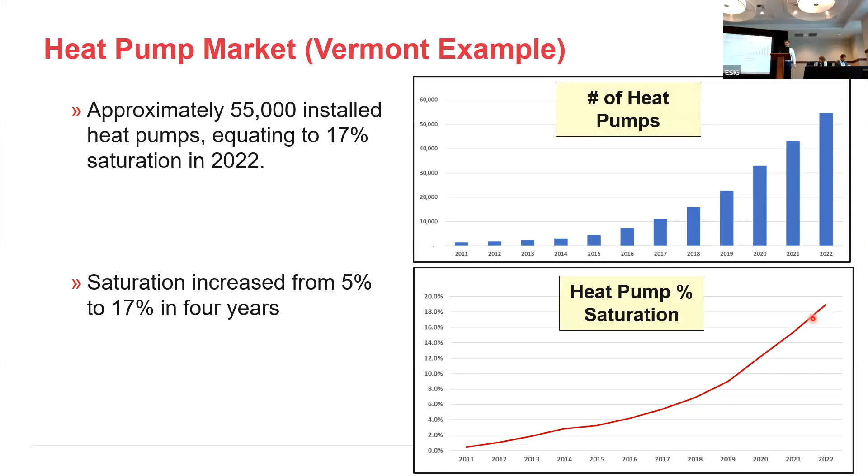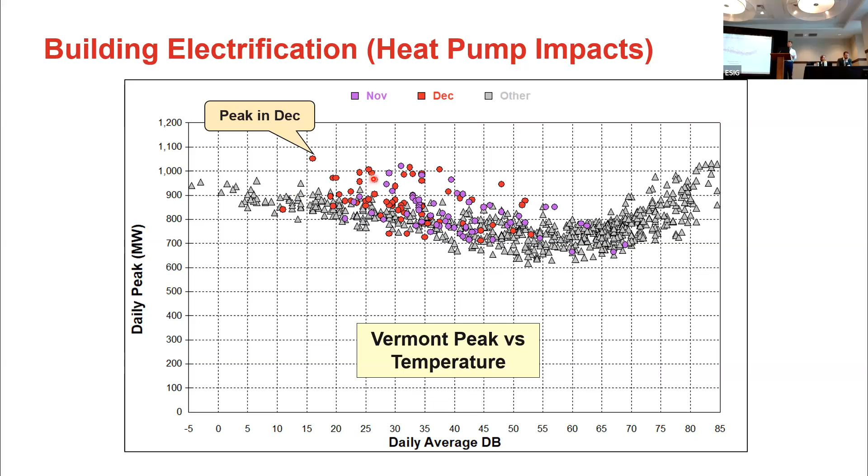So this was interesting. Haven't seen this at the system level elsewhere just yet. I don't know, is anyone else? So Vermont was an example case here. And then this got us thinking, okay, can we leverage AMI data? So this is actually from a different utility, but what we were able to do is identify certain customers that had a given heating technology. So we stratified the AMI data and looked at the different shapes.

So here we're looking at daily use per customer. This is the entire home, but the heating signature is very clear. You see the resistance heat is actually pretty linear as we move through those cold temperatures. Similar trajectory on the ground source heat pump, because they're highly efficient, they can support the heating requirement through the cold temperatures. The air source heat pumps here are backed up by alternative fuels. Of course, we see that they really cap out about 30 degrees, maybe a couple anomalies in here. But this is the signature that we saw on the prior slide.

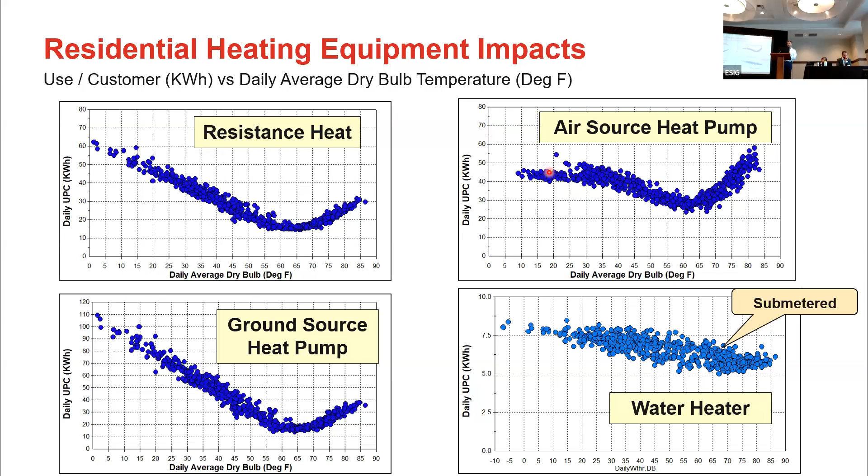So this is one way to look at it. Another way, of course, is digging into the NREL data. Looking at that in a couple different ways, we can roll up the sites as Arthur's done by the different technologies, but also there are end use saving shapes that are now available. I haven't dug into that yet, but it's on my to-do list for sure.

I would love to - is Elena working on that? To my knowledge, no one has looked at these shapes in great depth. But this is another way to look at how you really break out that space heating piece, looking at the impacts on the insulation of the homes, the heat pumps with varying efficiencies and backups. This is an important thing we need to look at and hopefully leverage the NREL data a little bit more heavily.

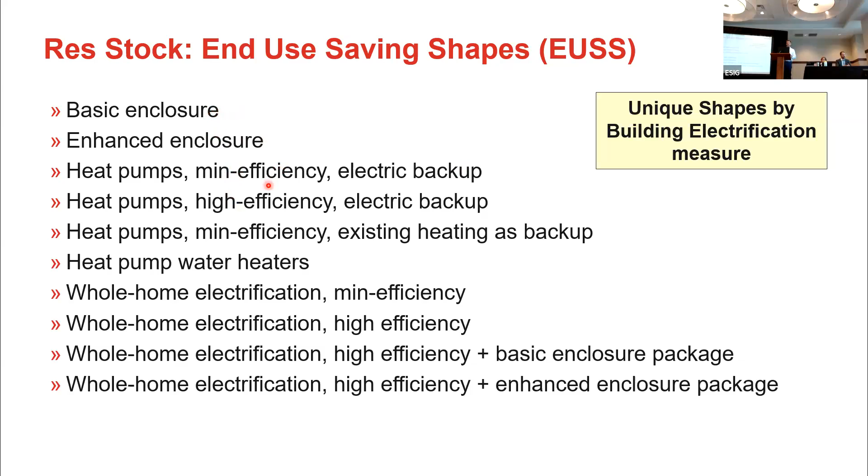Going forward, we can leverage the NREL shapes on the passenger vehicle side, as well as tempo, to look at county level adoption. That's one thing I think we need to also integrate.

And then on the fleet side, what we've done thus far is try to break out the fleets into various subsectors. We saw a great presentation from Jeremiah on this in terms of EPRI looking at actually a nationwide study. My understanding is the report is going to be available early next year.

That would be a fantastic resource that I think we need to leverage - start looking at where these ICE fleets are going to electrify, when, how much, and what impact that has on the grid at the system level. But also these can be highly concentrated and need to be addressed when we look at distribution planning at the feeder level.

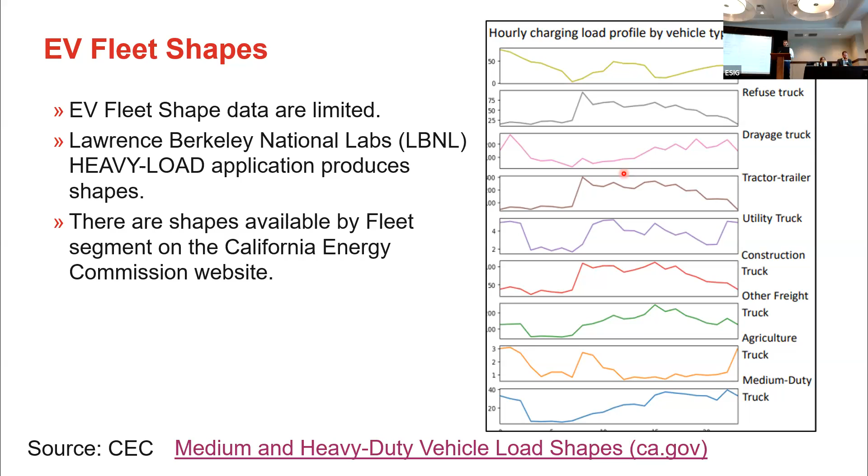I want to conclude with an idea - I think some of these resources are maybe easier to use than others, and perhaps we could bridge the gap through training sessions. I think that would certainly be helpful with ResStock and ComStock. Arthur, you dug into it pretty in depth, and much respect, because it takes a lot of expertise and tenacity to get in there.

But I think through some training sessions, we could open up that resource for other utilities, and maybe with EPRI and the report, perhaps finding the right forum to share that information, and then begin to think about how customers or utilities can localize that. Look forward to hearing your thoughts during the discussion.